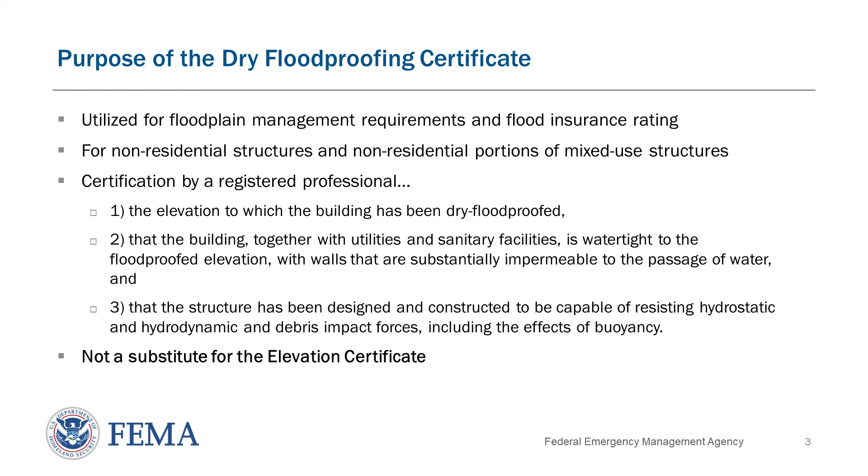Updates to this form and others are performed on a cycle, which creates an opportunity to align them with emerging information and provide additional clarifications or instructions. FEMA has updated the NFIP insurance rating methodology, leveraging industry best practices and cutting-edge technology to enable FEMA to deliver rates that are actuarially sound, easier to understand, and that better reflect a property's flood risk.

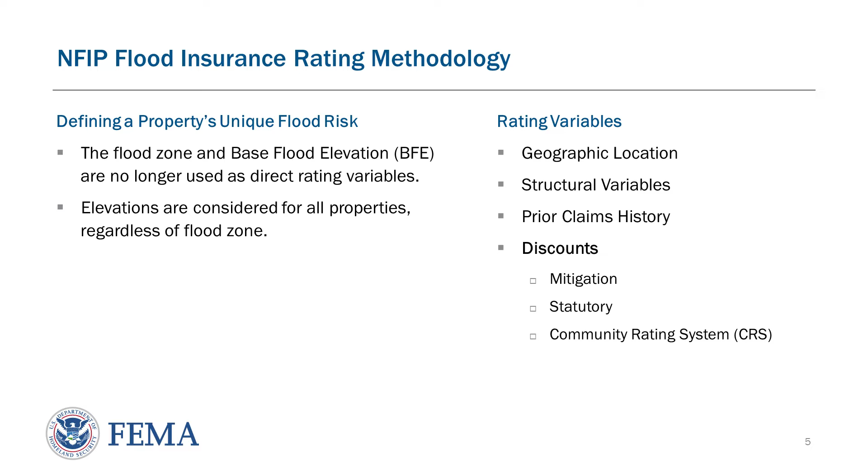FEMA now has the capability and tools to incorporate more flood risk variables to define a property's unique flood risk. Multiple flooding types, the cost to rebuild a particular structure, as well as geographic variables and a building's characteristics or structural variables are considered. A property's prior claims history and other mitigation and statutory discounts are also included in the calculations. One of those potential discounts is for dry floodproofing.

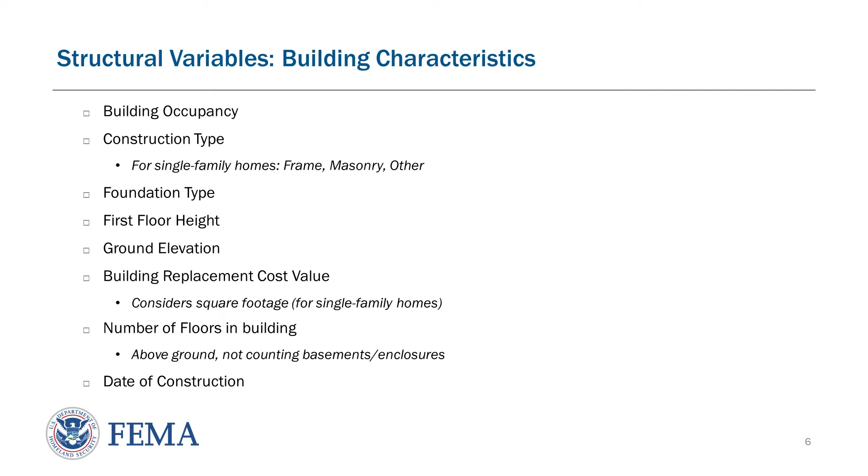Here's a brief list of some of those building characteristics or structural variables, many of which are captured on the elevation certificate. Then there are various types of flood insurance discounts that could apply when a property owner takes mitigation steps to help reduce flood damage to the property, or when certain construction elements or thresholds are met.

For example, there are discounts for certain foundation types, for proper elevation of machinery and equipment, or for being in a CRS participating community. In the case of a non-residential building, or a mixed-use building that's properly dry floodproofed, a policy discount may apply where appropriate. The Flood Insurance Manual describes that the NFIP requires a floodproofing certificate to consider the floodproofing mitigation measures in rating a building. This means you must have this certification to determine if you're eligible for that flood insurance discount.

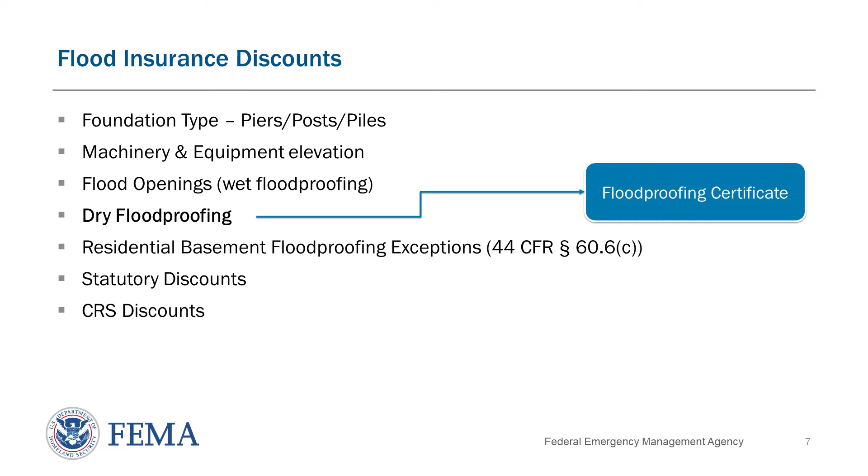Eligibility for a floodproofing discount is not just in the special flood hazard area anymore. FEMA is expanding those policy discounts, making them available to properties outside those high-risk flood hazard areas. So in non-coastal special flood hazard areas, those zones starting with the letter A, as well as outside of the SFHA, in zones B, C, D, or X, floodproofing discounts are going to be available. This discount is not available in V zones because dry floodproofing is not allowed in V zones.

The instructions on the form specify the expanded availability of the discount. The performance standard of 1 foot above the base flood elevation, or BFE, in the special flood hazard area is still listed. Plus, for non-special flood hazard area zones, the performance standard of 2 feet above the natural highest adjacent grade, or HAG, is the performance standard for eligibility for credit. We'll come back to this performance standard when we talk about the sections of the form.

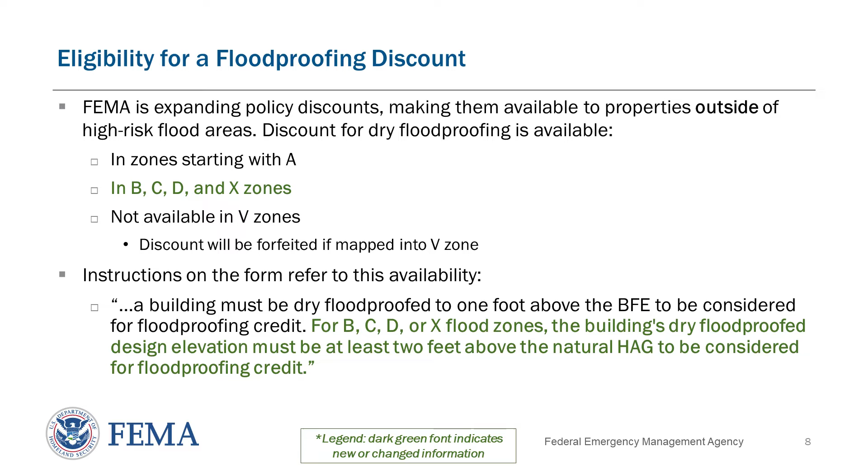While the form we're talking about in this video is for non-residential structures, please note that there are very rare cases where communities have an exception from FEMA for dry floodproofing residential basements. There are not very many of these across the country. They must have specific language in their local ordinance, and they must pass a technical review by FEMA before approval. This is defined in 44 CFR Section 60.6. For these rare cases, there's a separate residential form, the NFIP's Residential Basement Floodproofing Certificate. For more information, please visit FEMA.gov.

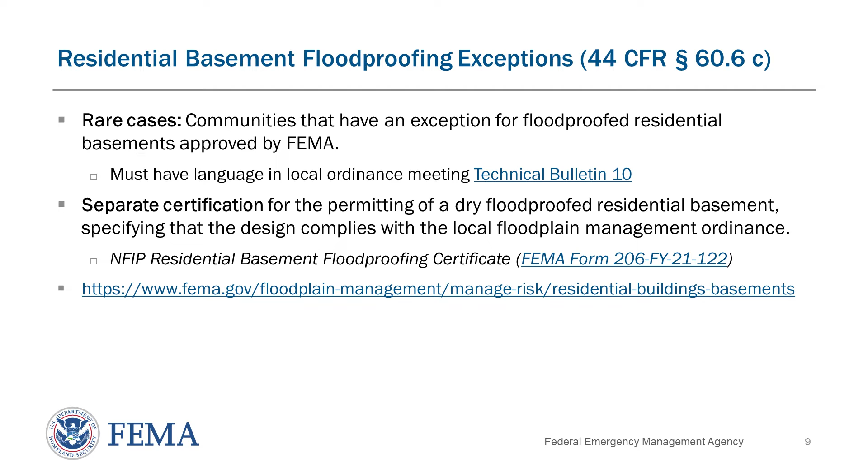Another reason for updating this floodproofing certificate is to reflect building code requirements. While the minimum National Flood Insurance Program requirement is dry floodproofing to the base flood elevation, building codes that many states adopt do go beyond that minimum.

The international codes have provisions that constitute higher standards, such as freeboard, and ASCE 24 talks about flood-resistant design and construction. This engineering consensus standard has been incorporated by reference by the I-codes since 2000. Although some states don't require adoption of the I-codes, FEMA still recognizes this as the national standard, and thus as the threshold for eligibility for that flood insurance discount.

According to ASCE 24, the minimum elevation for dry floodproofing is at least to the base flood elevation plus 1 foot. ASCE 24 also specifies that dry floodproofing measures are not allowed in coastal high hazard areas, coastal A zones, and other high-risk flood hazard areas. These measures are also not allowed for residential structures. This information helps floodplain administrators in determining the appropriateness of dry floodproofing in each area.

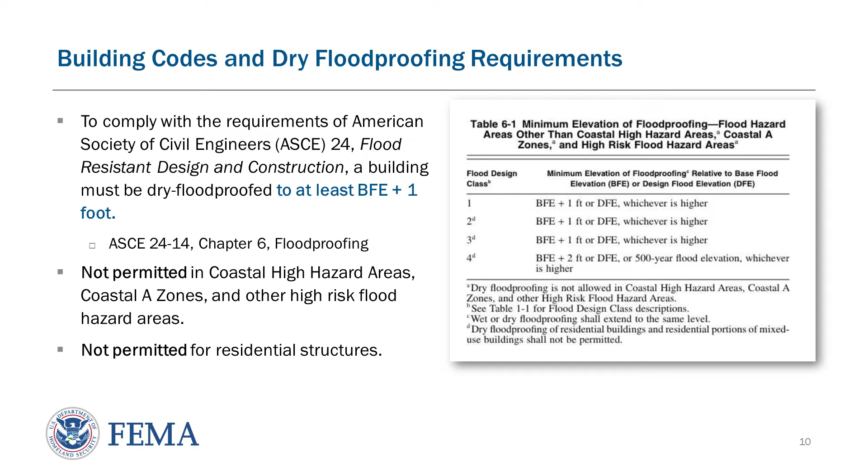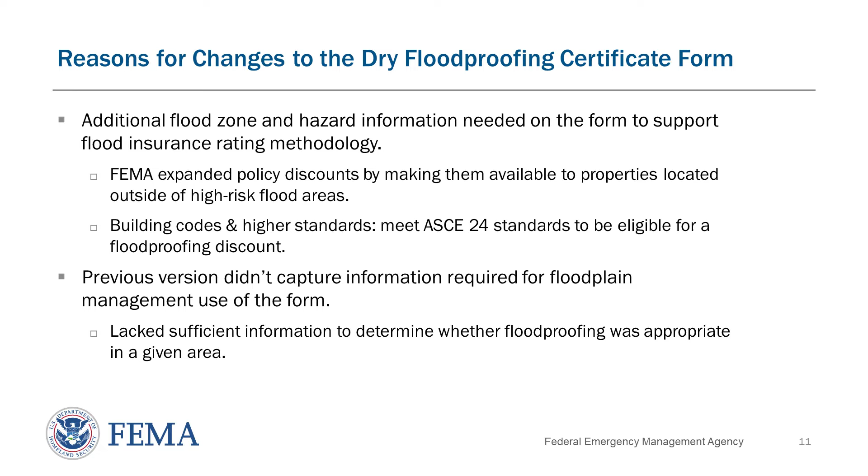Some of this data was not previously captured on the floodproofing certificate, so an update to the form was needed. In summary, key updates to the form relate to the NFIP flood insurance rating methodology, needing data the old form did not provide. Due to the expansion of policy discounts available to properties located outside the SFHA, we now need information about those areas. This addition also clarifies questions related to the building code and the ASCE 24 standards, which the form didn't previously capture. Finally, this updated form will better capture the information needed to help floodplain managers determine whether dry floodproofing is even appropriate in an area.

Before we get into the form section by section, let's revisit some key definitions and some of the regulatory basics in CFR about floodproofing, specifically dry floodproofing. Floodproofing is defined as any combination of structural or non-structural additions, changes, or adjustments to structures, which reduce or eliminate flood damage to real estate or improved real property, water and sanitary facilities, structures, and their contents. You'll notice that this definition does not specify wet or dry. In the NFIP regulations and the expanded guidance that discusses how this is done, floodproofing is understood to refer to dry floodproofing, rather than the wet floodproofing approach of letting floodwaters enter and flow through a structure.

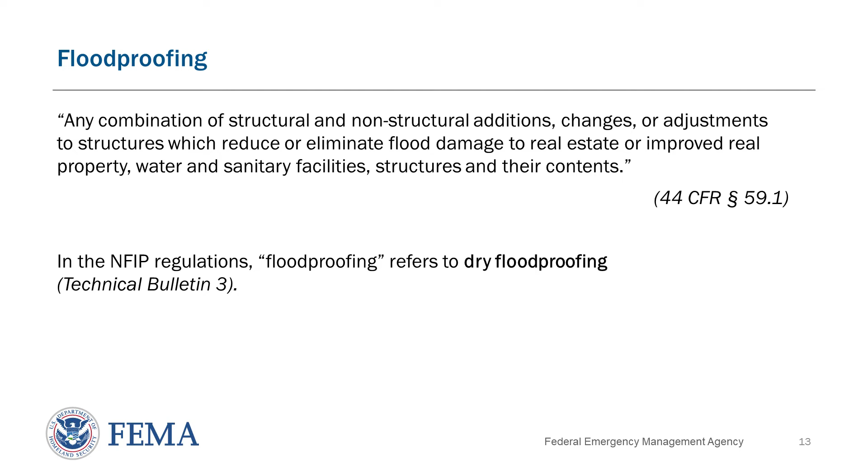Let's highlight that distinction between wet and dry floodproofing. Wet floodproofing is those structural measures that provide resistance to flood damage while fully allowing the floodwaters to enter that structure or area. Here, we're typically talking about things like flood openings or breakaway walls for enclosures below the BFE, along with flood-resistant materials and methods in those enclosed areas, as well as the proper protection of mechanical and utility equipment. Under the NFIP, wet floodproofing is limited to enclosures below elevated structures that are used only for storage, parking, and building access. It's also allowable for accessory or agricultural structures that have been issued variances for wet floodproofing by the community.

Dry floodproofing, by contrast, is the type where we're trying to keep water out of the building. This is not going to allow floodwaters to pass through. Those enclosures use special sealants, components, equipment, coatings or doors or panels, shields or pumps to keep it watertight and substantially impermeable. That's what this dry floodproofing certificate is for. Dry floodproofing is an approach that is not appropriate in all areas or for all uses. It's not permitted for residential structures or for any structures in those coastal high hazard areas where the buildings are subject to added wind and wave forces.

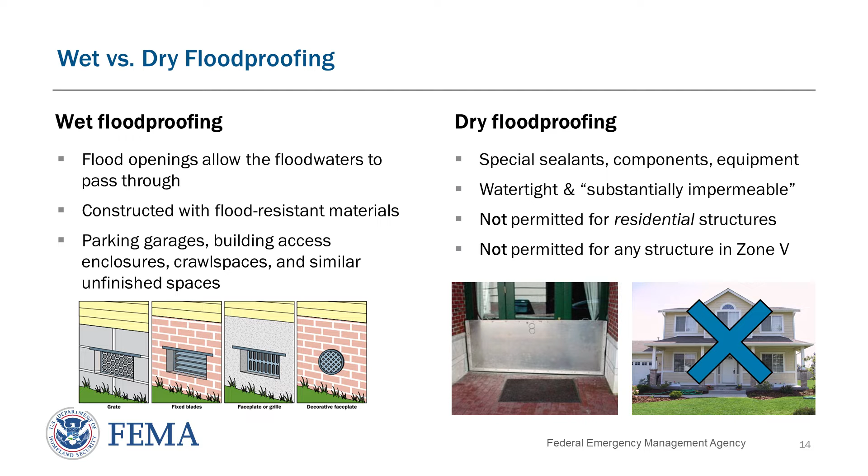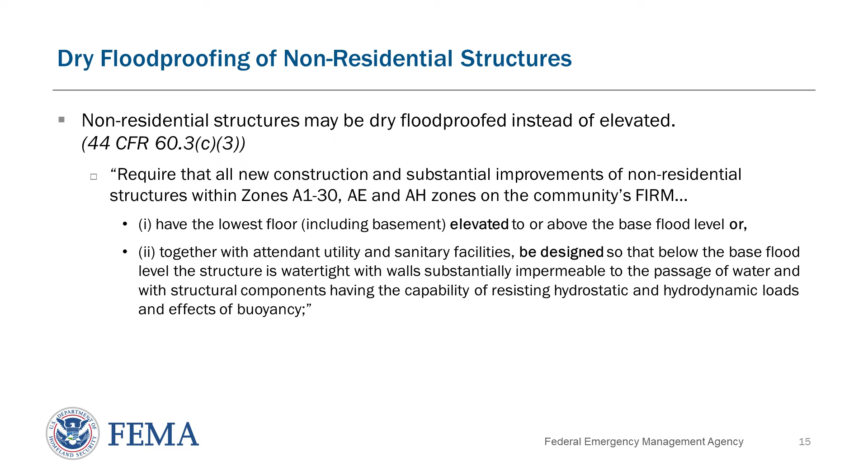The Code of Federal Regulations tells us who can take this approach and what the standard of performance is. For non-residential buildings or non-residential portions of mixed-use buildings, dry floodproofing may be permitted as an alternative to elevation in those non-wind and wave action zones. If that dry floodproofing path is taken, then the appropriate certification is required. You will need a registered professional engineer or architect to review the design, specifications, and plans to verify the construction is in accordance with the accepted standards of practice. This is a foundational reason for why we have the Dry Floodproofing Certificate. The local floodplain administrator is required to maintain a record of those certifications.

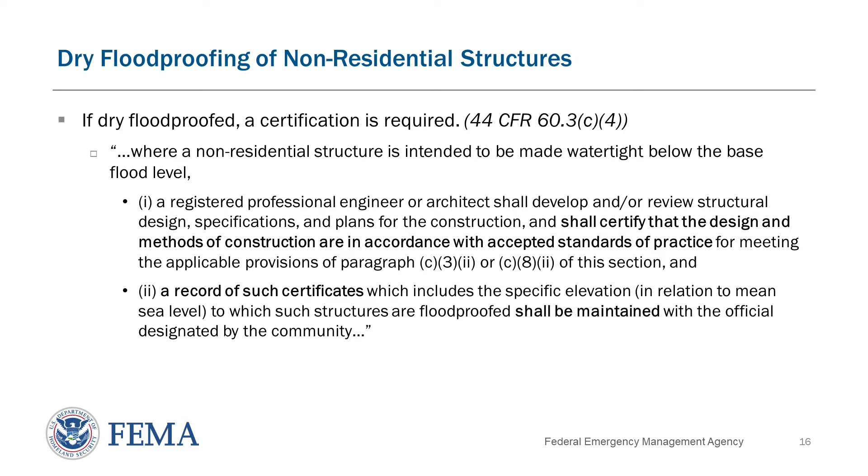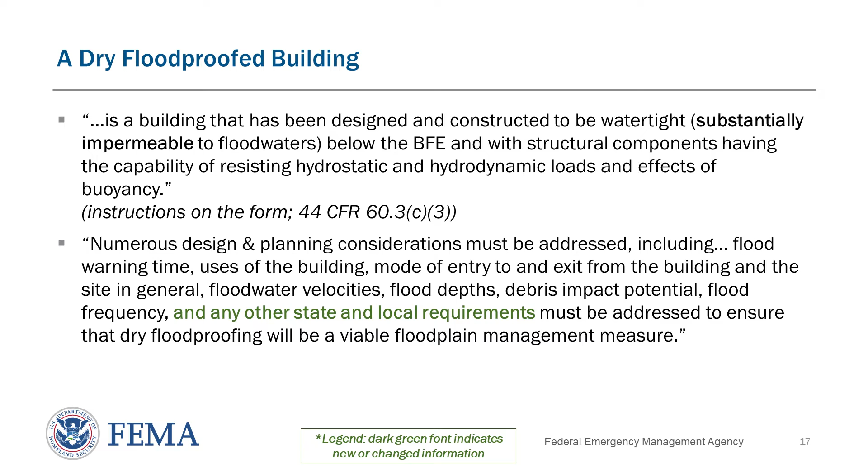Language from the CFR is reflected on the purpose and introduction page of the Floodproofing Certificate. A bit of new text in the instructions recognizes that there may be other higher state and local requirements that also need to be addressed or considered when ensuring that dry floodproofing is an appropriate or viable flood protection measure in an area. There are many things to consider when choosing whether or not to take a dry floodproofing approach. Let's review what substantially impermeable actually means. FEMA Technical Bulletin 3 and our engineering design standards acknowledge that in a building designed to be watertight, seepage through different points of entry might result in some accumulation of water during flooding.

ASCE 24 says a structure is considered substantially impermeable if it is not allowing more than 4 inches of water to accumulate on the inside of the building in a 24-hour period, without relying on active devices for the removal of the water. This is different from wet floodproofing, where we're allowing all of the water in. Here, we're trying to keep all of the water out, but we recognize there may still be a little bit of seepage.

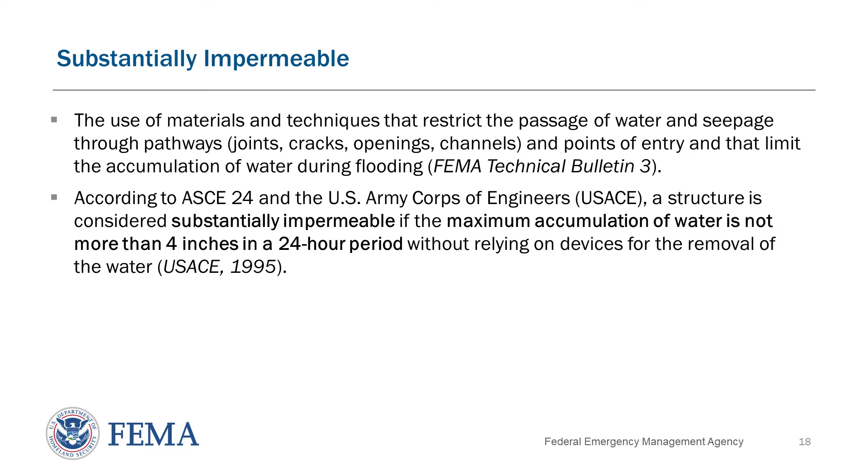There is not a one-size-fits-all approach to dry floodproofing. There are many different measures, or combinations of measures, that can meet this performance standard. It could be just doors and windows, or panels, or just seals, or a combination of those things.

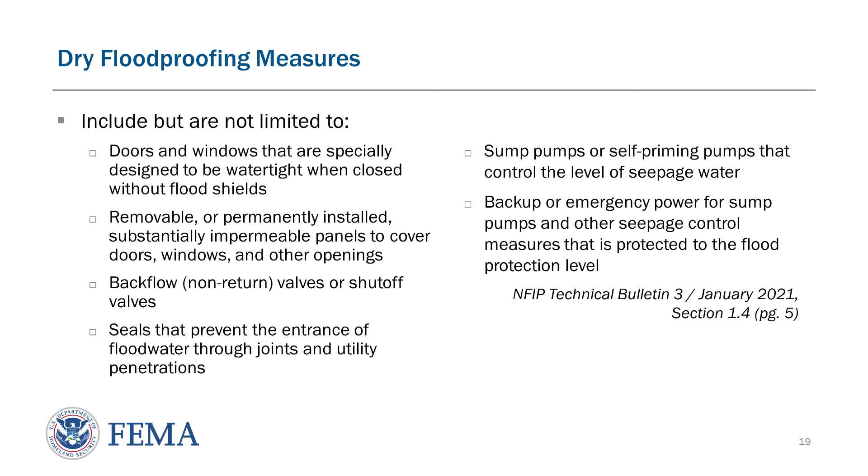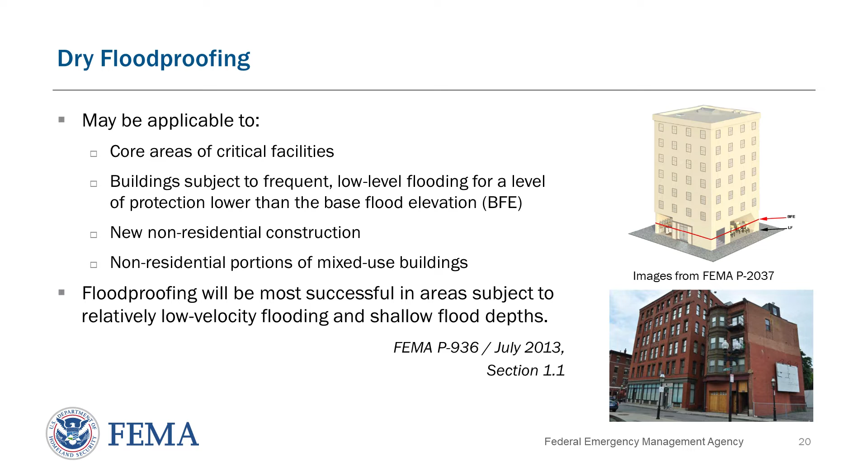FEMA technical bulletins and guidance documents provide discussions of when it might be appropriate to use this approach. Floodproofing might be appropriate for core areas of critical facilities, buildings that are non-residential and subject to frequent low-level flooding, new non-residential construction, or non-residential portions of mixed-use buildings. Again, dry floodproofing would be most successful in those areas that do not have high velocity flooding and do not have very deep flood depths.

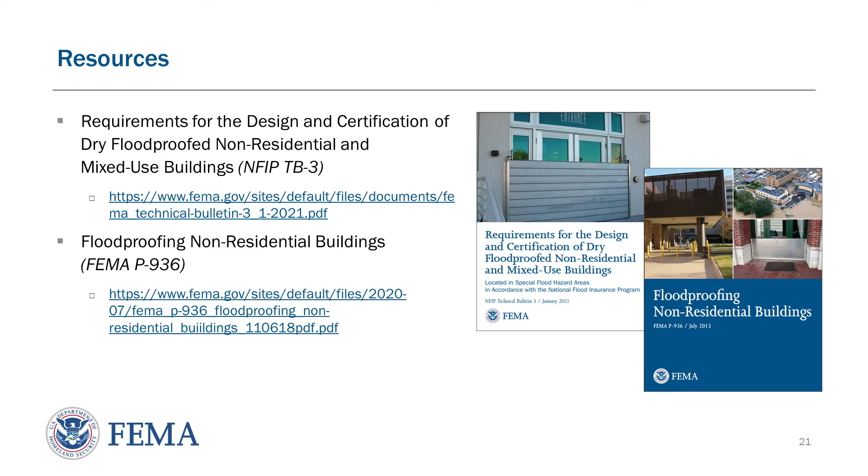Because there's not a one-size-fits-all approach, FEMA has detailed guidance about what performance standards must be met for a structure to be considered appropriately dry floodproofed. Engineering calculations, methods, and standards are found in FEMA Technical Bulletin 3 and in Publication 936 about floodproofing non-residential buildings, as well as in Publication 2037, Flood Mitigation Measures for Multifamily Buildings.

A determination of whether something is dry floodproofed will involve technical analysis and justification. This is much more about data, backup documentation, and an assessment of components, so we need a registered engineer's signature and seal to certify that design is in accordance with ASCE 24. The local floodplain administrator uses this in their permit review process and will keep that documentation in their permit records.

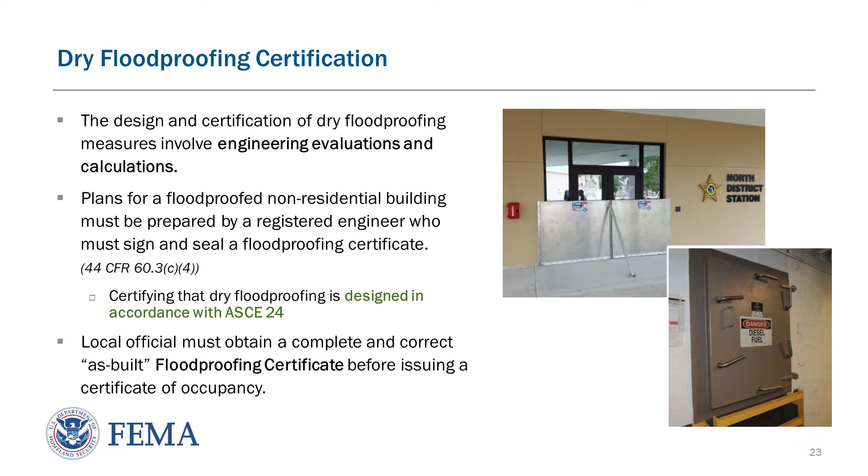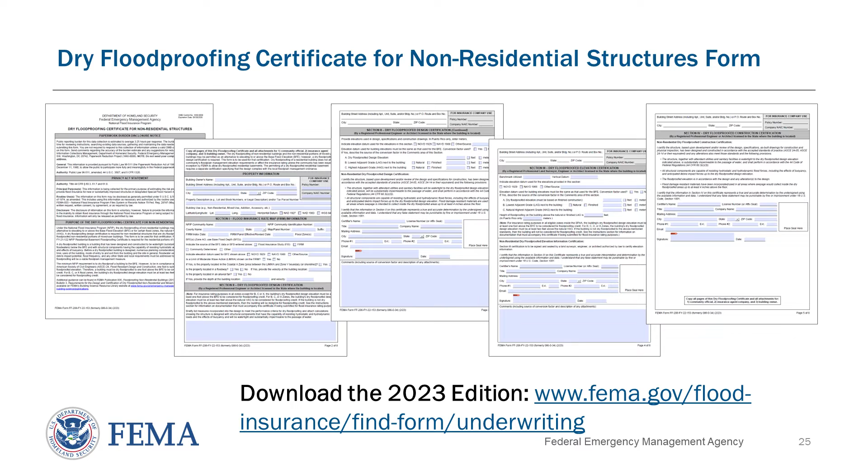Next, let's talk about the form itself. The Dry Floodproofing Certificate for Non-Residential Structures form now has 4 sections, plus a few pages for instructions. The new form was implemented on July 7, 2023, and is currently available for download at FEMA.gov. The previous version of the form has been approved for use until November 1, 2023.

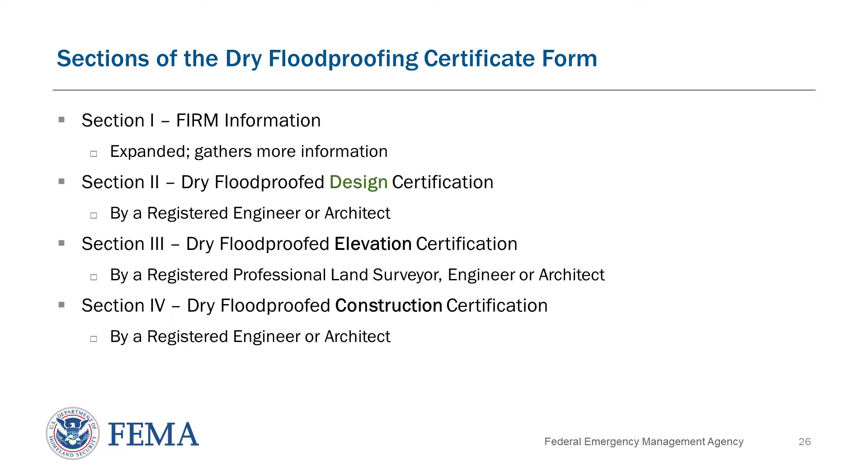The form has 4 sections, with expanded instructions that provide additional clarity on the required documentation that must be attached. There is no section for the public or homeowner to certify information on this dry floodproofing certificate form. This is a form used by engineers and other licensed professionals.

The instructions specify the dry floodproofing approach for non-residential buildings, and that for mixed-use buildings, it might be appropriate to dry floodproof just those non-residential portions on the lower floors. The instructions provide a detailed listing of the required documentation that must accompany this certificate. Also included in the expansion to the instructions are updated web addresses for relevant guidance documents and updated links to FEMA's Flood Map Service Center.

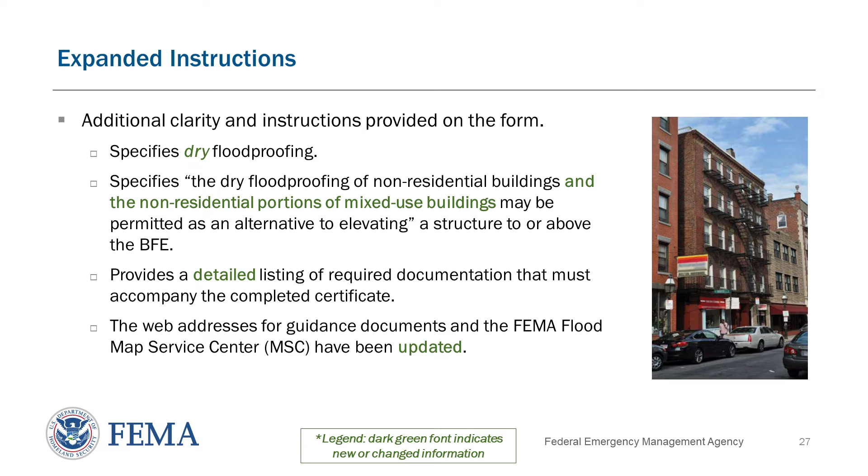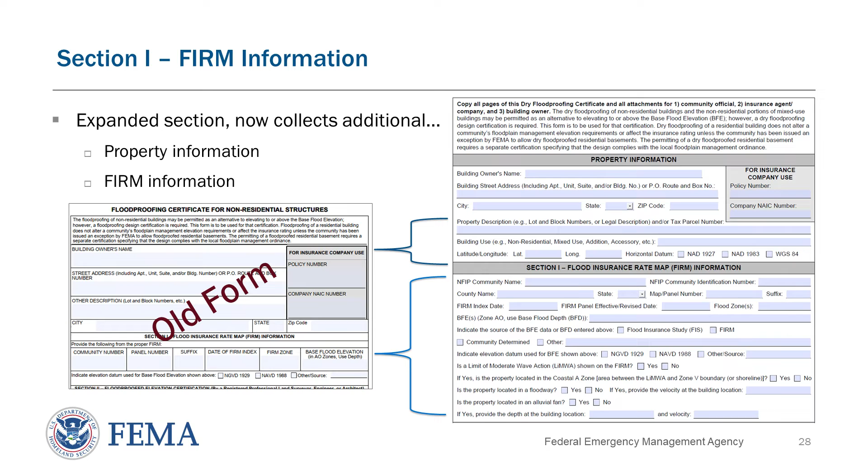Section 1 is for the flood insurance rate map, or FIRM, information. In comparison to the prior version of the form, we're now collecting additional property information and additional information off the FIRM with better descriptions of the hazards. In this section, we're still collecting information that describes the property. There's now a row for building use.

This is important because the dry floodproofing approach is applicable only to certain types of structures. There's a new row for the latitude and longitude, as well as the horizontal datum.

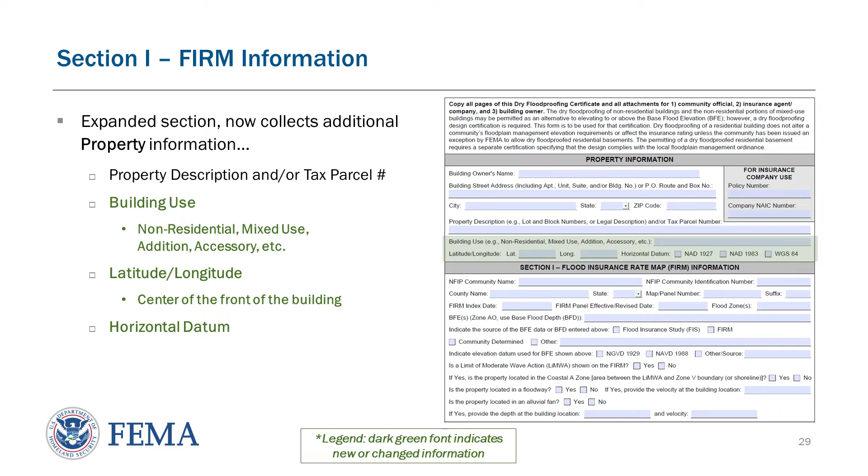On the FIRM information portion of Section 1, we're collecting both the community name and community ID, or CID number. This helps ensure FEMA is appropriately applying the correct participating community in which the structure is physically located.

There's a prompt here for multiple flood zones and base flood elevations for sites where there might be a bit more nuance to what's going on. For example, there may be a larger commercial structure partially in an AO zone and partially in an AE zone. In this case, there would be multiple flood zones and BFEs or depths that would apply. The form is also asking specifically about the source of the BFE or depth.

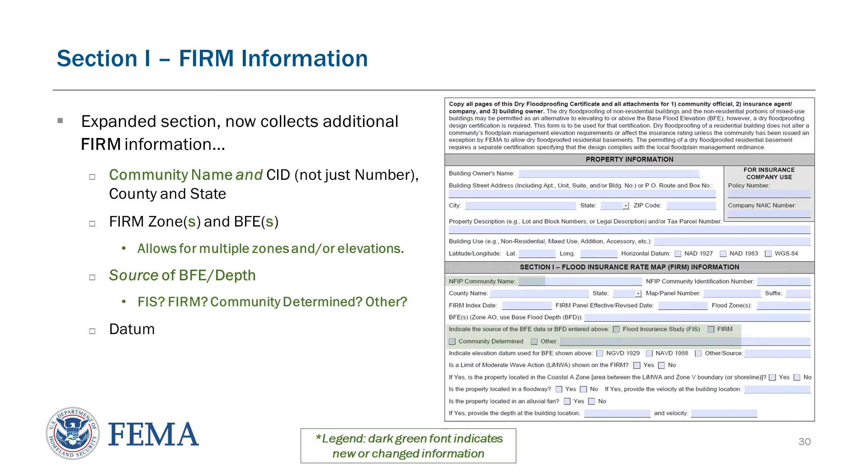We're now collecting information on 3 elements of flood hazard details. These tie directly back to ASCE 24 and the thresholds for determining when dry floodproofing is appropriate.

First is the limit of moderate wave action, or LiMWA. If that line is shown on the FIRM, we're going to check a box indicating so. Then we want to make sure we understand the location of the building in relation to that LiMWA line. This ties right back to the ASCE 24 standard. Here we're looking to demonstrate whether a building is landward of the LiMWA, where dry floodproofing is permitted, or waterward of that line, where it is not permitted.

Next is regulatory floodway. If you've got a structure in or partially in a regulatory floodway, indicate that here. Obtain the velocity in the area of that building. Then we'll verify if the velocity is underneath the threshold that would make it ineligible for that mitigation discount credit. Finally, for sites located in an alluvial fan, you must indicate both the depth and the velocity of the water.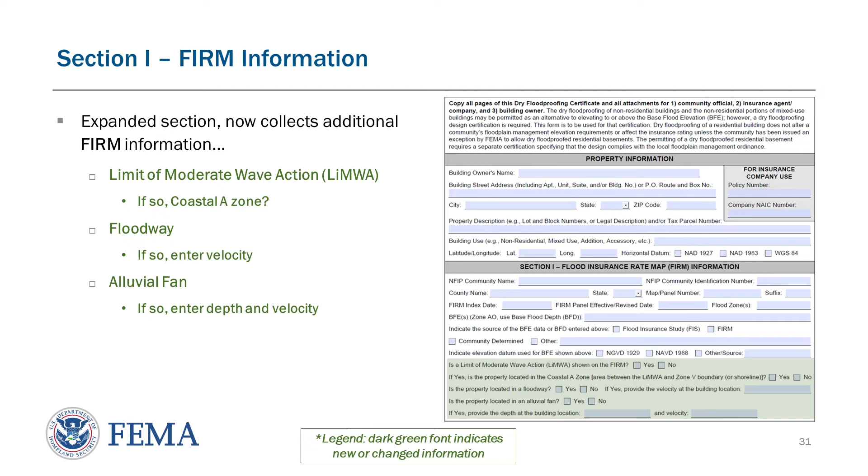Here's a walkthrough example for each of those three elements.

For the LiMWA, the form asks: is there a limit of moderate wave action shown on the FIRM? Yes or no? In example structure A, there is a limit of moderate wave action shown on the FIRM. Note that the arrows pointing towards the open ocean or shoreline indicate the waterward and landward directions for this particular map on the left. For structure A, we would label this yes on the FIRM and show that it is not located between the LiMWA and the Zone V boundary or shoreline.

This one is landward of the LiMWA, so indicate no in the second box. Property B is waterward of the LiMWA line. In this case, on the form you would say yes and yes.

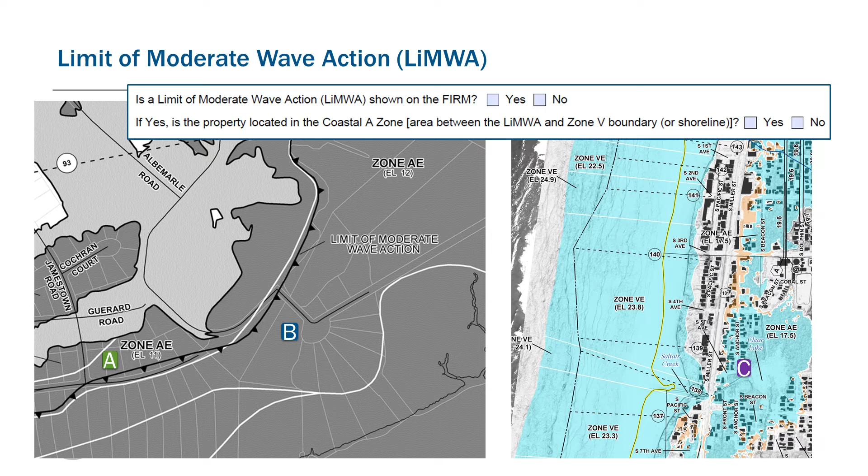With example C on the right, if you're having trouble finding the LiMWA line, it's because there isn't one. In this case, we would just say no on the form, because there is no limit of moderate wave action shown on the FIRM.

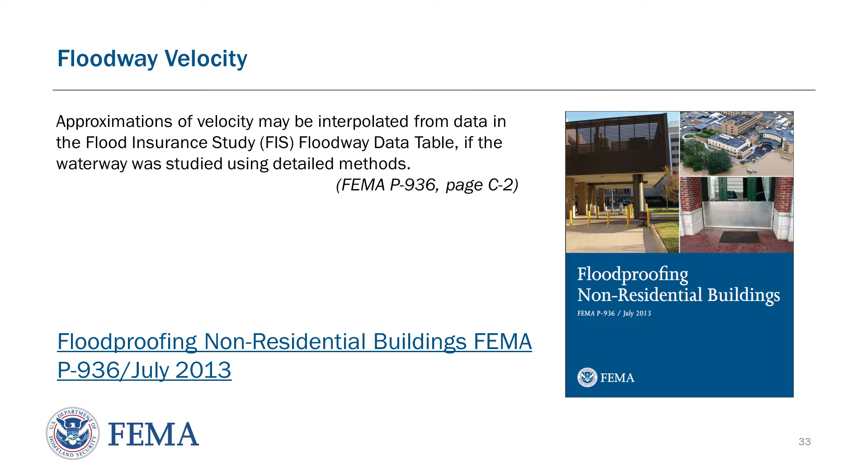For regulatory floodways, we'll refer back to guidance in FEMA Publication 936. It specifies that we can get these approximations of velocity from the data in the floodway data tables in the flood insurance study.

As an example of what that looks like, here are a few fictional structures that are partially or completely in a regulatory floodway. In this case, we'll check the box for yes on the form. Then, we need to go and get some more information from the flood insurance study.

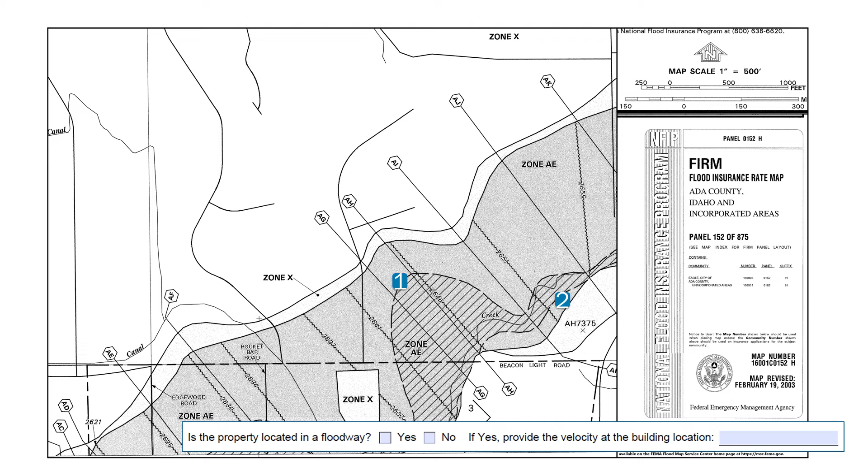Find the floodway data tables for the appropriate flooding source and confirm you're looking at the table with the correct riverine cross-sections. When determining the BFE, we know that we cannot interpolate between wavy lines on the map for the BFE. For the floodway velocity piece, guidance tells us that we can interpolate those approximations of velocity from the data in the FIS data table.

So property 1 is located between cross-sections AH and AG. We'll go to the floodway data table and find the mean velocity column. We can interpolate between 4.8 and 3.8, so we'll say that's about 4.3. Again, we're rounding to the same nearest tenth of a foot found in the data tables.

Property 2, on the other hand, has a narrower regulatory floodway. Between cross-sections AJ and AI, we see 8.9 and 7.8. So we're looking at about 8.3 or 8.4 for our floodway velocity here. In both cases, we would indicate yes for velocity and then provide the number at the building location.

Of course, this would be in addition to all other floodway development requirements, including no-rise analysis. Doing this exercise for the dry floodproofing certificate does not substitute for an H&H floodway encroachment analysis for a proposed building.

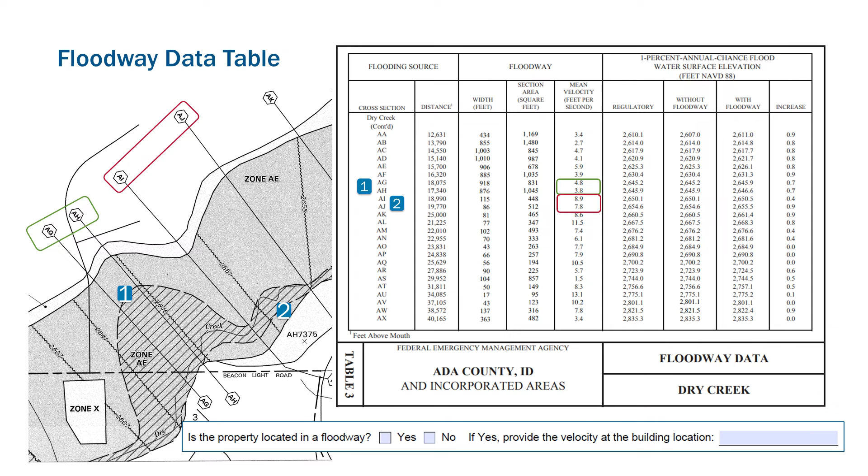For our alluvial fan example, note that these AO zones have both a depth and a velocity printed right on the map. So we would say yes on the form, and then we'd provide the depth in one blank and the velocity in the second blank.

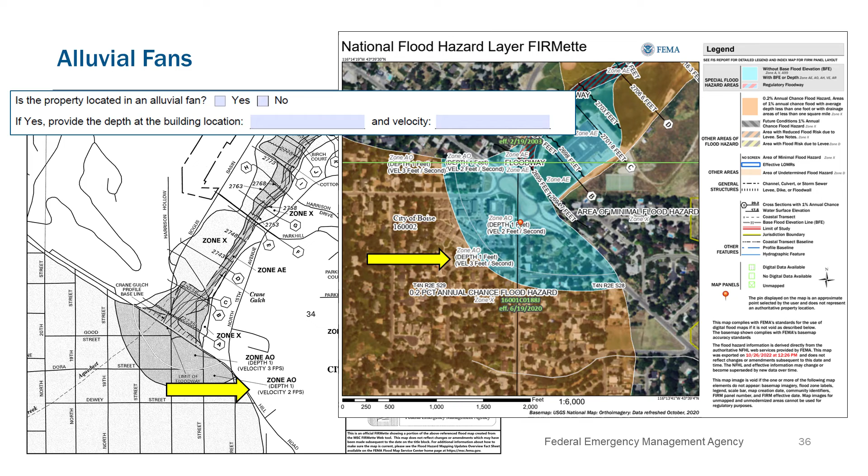Why collect this additional information? The floodplain manager is going to use this data for floodplain management purposes, but it's also useful for underwriters for verifying the eligibility for that dry floodproofing discount.

Remember, the minimum NFIP standards don't specify the limits based on the depth, velocity, or the presence of waves, but the FEMA technical bulletins and ASCE 24 do. FEMA does not recommend use of those dry floodproofing systems in areas where the depth of water is greater than 3 feet, where the velocity is too high, greater than 5 feet per second, or in coastal A zones waterward of LiMWA with breaking waves between 1.5 and 3 feet.

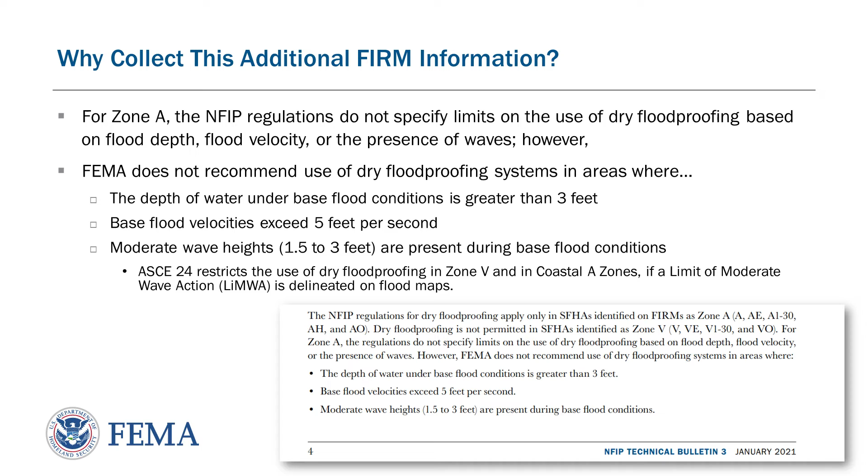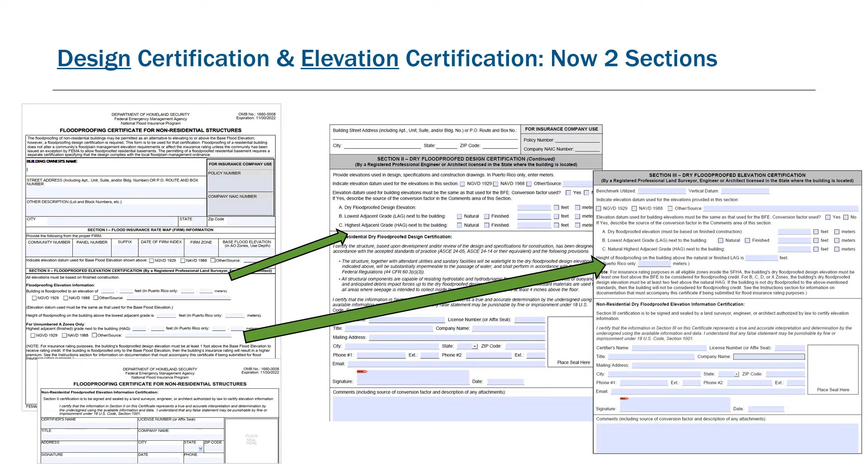There are now separate sections for design or pre-construction certification, as well as for finished construction elevation. There are different requirements for what professionals can complete in each section.

Section 2 is our new section, and it is for floodproofed design certification. It sets up the answers needed about the floodproofing methods that we're asking a registered professional engineer or architect, who is licensed in that state, to certify.

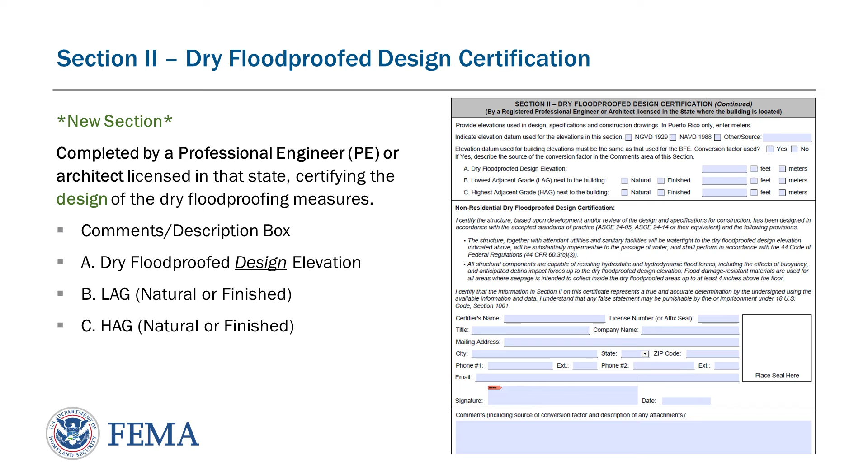The form asks what the dry floodproofing approach is, and to describe the result of that floodproofing approach. The comments and description box has space to capture this description, the design elevation, and the adjacent grades. Remember, this is prior to construction.

Because there are multiple ways to meet that dry floodproofing performance standard, it's important to tell the story of the proposed methods and measures here, and report the results or targets that approach will meet. There are feet or meters indicator boxes, and you'll also be indicating natural grade or finished grade for the lowest and highest adjacent grades. These are collected right next to the building.

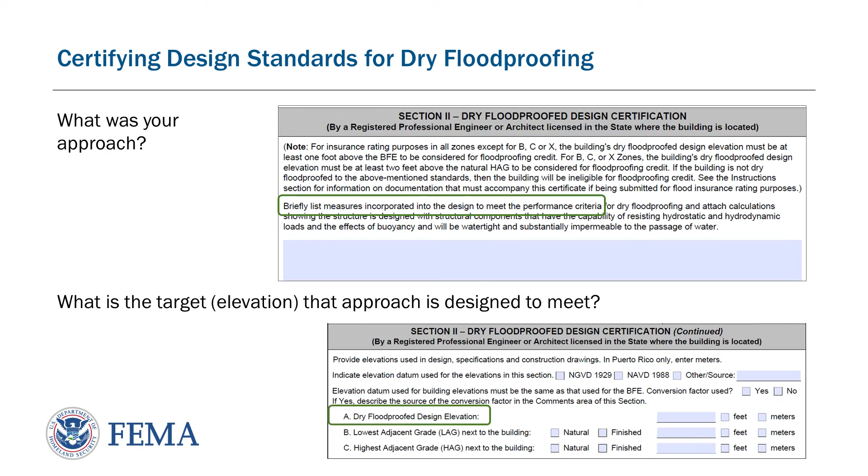Reinforcing the need to certify pre-construction design, here are some diagrams from various FEMA publications on those performance standards. This diagram shows how there might be some seepage, even in a dry floodproofed building where we're trying to keep all the water out. If we have less than 4 inches of water accumulating in a 24-hour period, ASCE 24 says that's substantially impermeable.

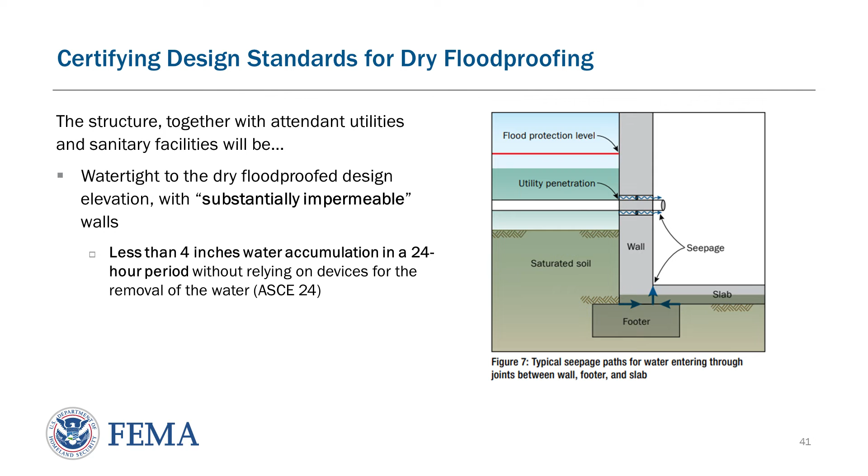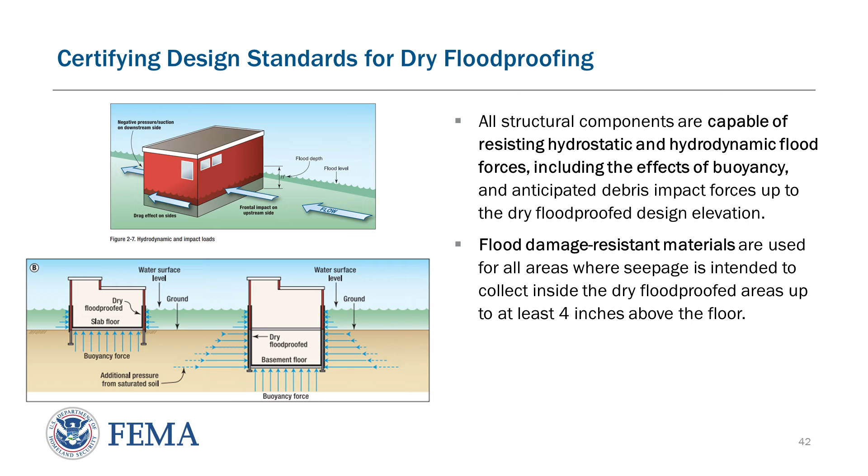Is the building capable of resisting all those flood forces? Hydrostatic and hydrodynamic forces? What about the effects of buoyancy? And are there appropriate flood damage resistant materials anywhere there could be some seepage?

Section 3 is for as-built certification. This confirms the as-constructed conditions or the elevation the building is dry floodproof to. The height above the lowest adjacent grade is also collected, with checkboxes to specify natural or finished. We're also documenting highest adjacent grade, specifically natural highest adjacent grade.

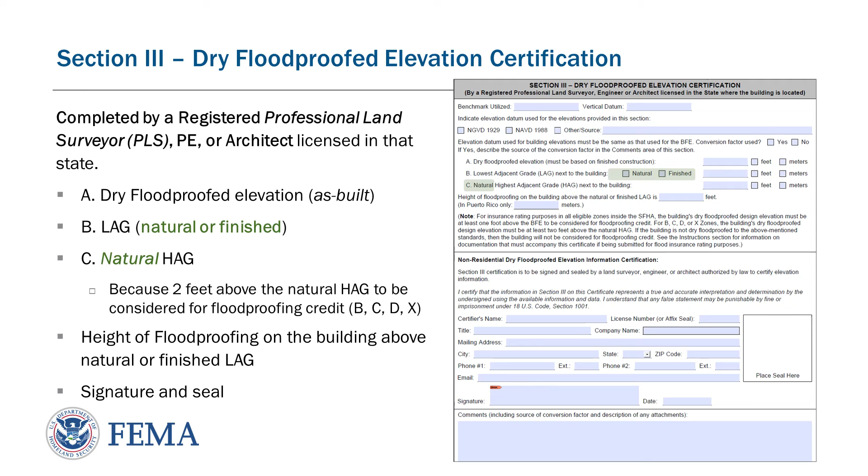That's because inside the special flood hazard area, we're looking for 1 foot above base flood elevation, and outside the special flood hazard area, at least 2 feet above the natural highest adjacent grade. That's the performance standard to be considered for dry floodproofing credit. The height of that floodproofing on the structure above the natural or finished lowest adjacent grade is also written as an indicator here. It should match the difference between your floodproofed elevation and your lowest adjacent grade elevation.

There's a new checkbox prompt if a conversion factor is used. If the datum used was different between the FIRM information and the building elevations collected, then the surveyor or licensed professional is prompted to check that box and describe the conversion factor in the comments area of this section.

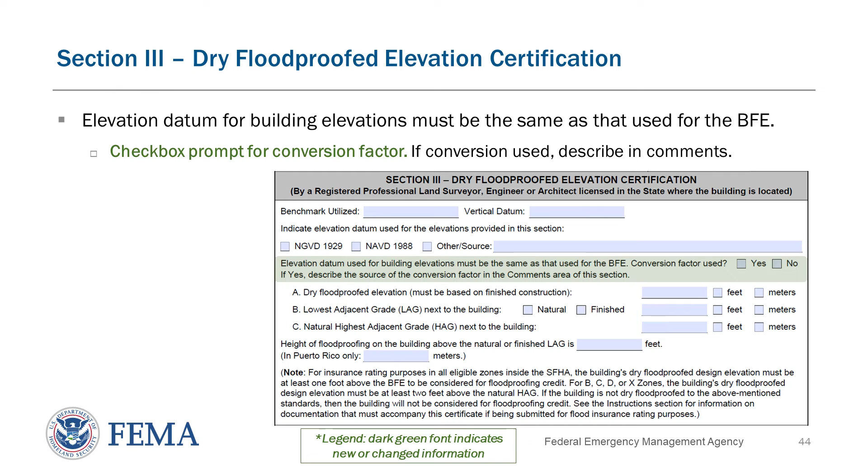The notes have also been expanded for this section with detail about the performance standard for dry floodproofing credit. 1 foot is subtracted from the dry floodproofed elevation, so a building in the special flood hazard area must be dry floodproofed to at least 1 foot above the BFE to be considered for floodproofing credit. And for those locations in zones B, C, D, or X, the building must be dry floodproofed to at least 2 feet above the natural highest adjacent grade to be considered for that dry floodproofing credit.

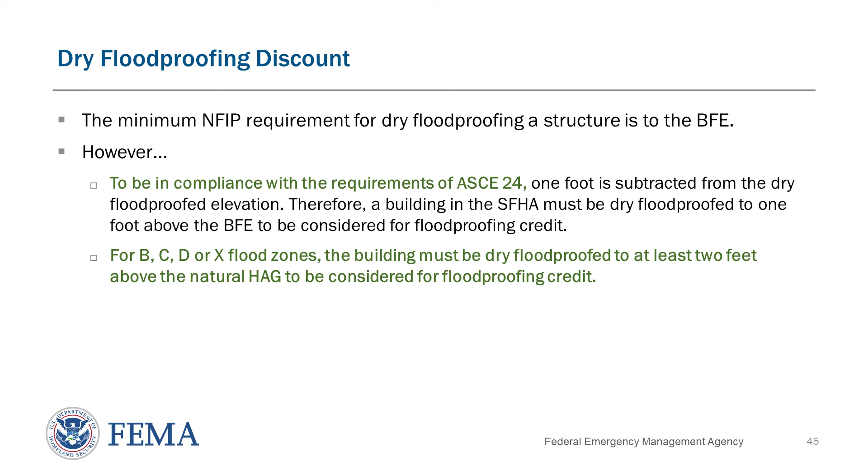Finally, Section 4 is where we put it all together. Section 2 said, here's what we're shooting for in the design. Section 3 says, here's the as-built elevations and adjacent grades. And Section 4 is where the engineer or architect says, I'm here to tell you that those 2 things together are enough. This section certifies both the design and the construction based on as-built drawings, the design specs, and a physical inspection of the finished construction of that building.

No additional data or numbers are entered or collected here. This is just a signature and a seal for the engineer or architect to certify their assessment.

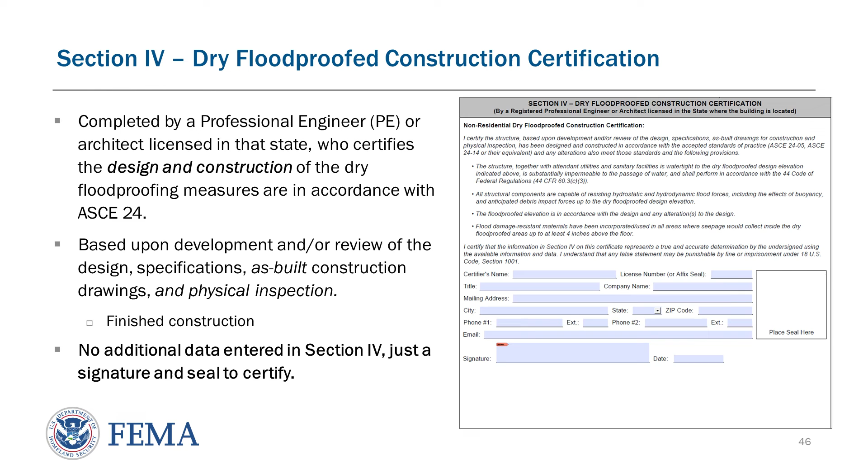The instructions for Section 4 have been expanded. It's still specifying, showing that the building is in accordance with accepted standards of engineering practice, that it is substantially impermeable to the passage of water, and that all of the structural components are capable of resisting flood forces.

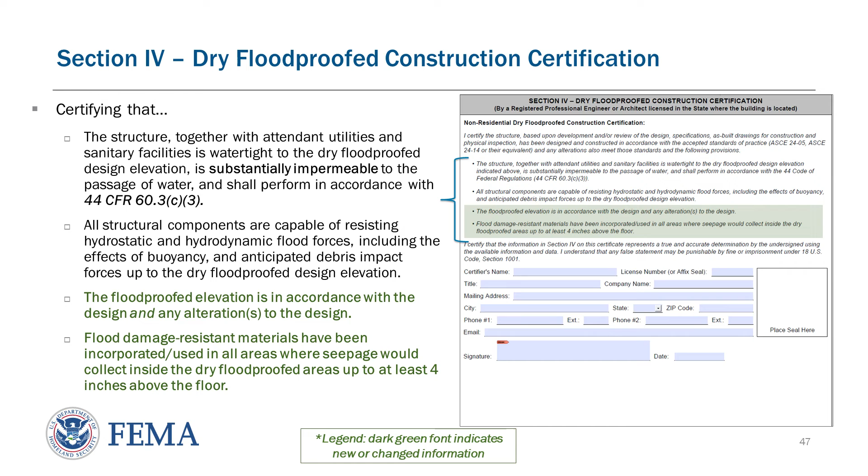There's a bit of new language that specifies the use of flood damage resistant materials in places where seepage may be expected, and clarifying that the as-built is in accordance with the design and any alterations to the design. If something had to change between design and as-built, this is a prompt to make sure that the information from design in Section 2 and finished construction in Section 3 considers and incorporates that alteration.

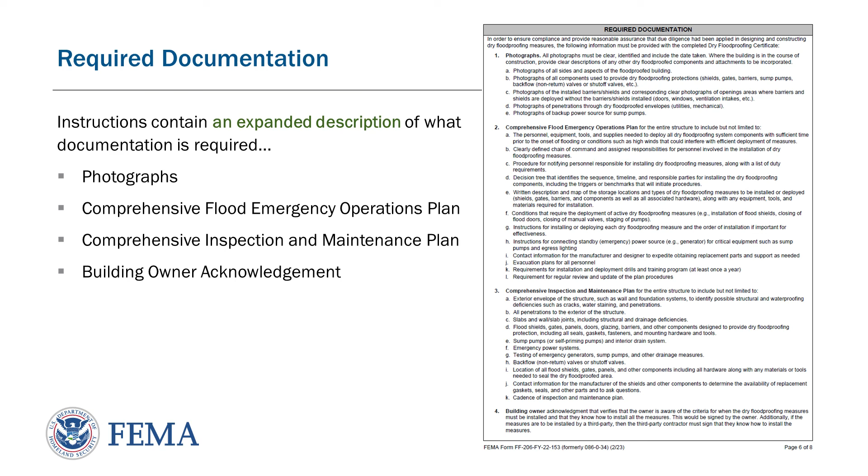To have that reasonable assurance that the engineer or architect did their due diligence, there's a lot of information that must be provided as backup documentation with this certificate. You can see there is a lot of detail and many specific instructions about the needed documentation. Photographs, a comprehensive emergency operations plan, an inspection and maintenance plan, and a building owner acknowledgement letter or form are all needed. Here's a summary slide for each of those types of required documentation.

For photographs, the form has more explicit detail about the multitude of photos wanted in order to be able to tell the story of how that dry floodproofing was achieved. What measures were used? What kind of components were used? Can we see all sides and aspects of the building wherever possible?

Take photos of all the different elements, the barriers, the shields, where they're deployed, where they're stored, and so forth. Someone should be able to review the photos and verify the information provided in the design and construction specs.

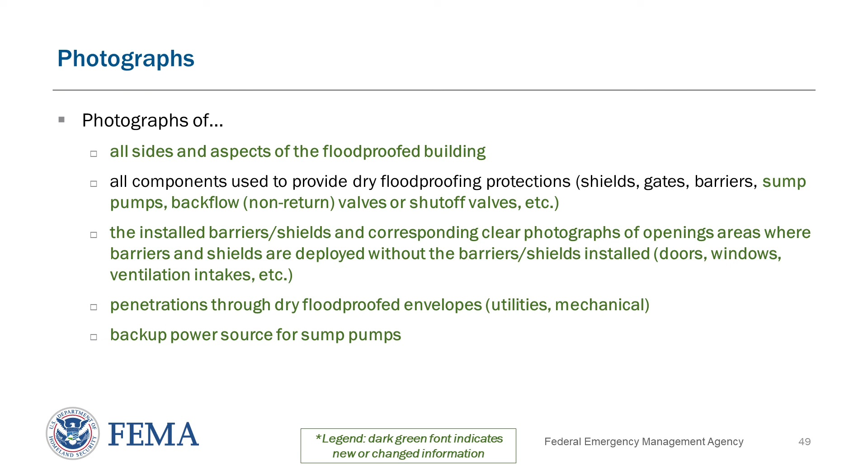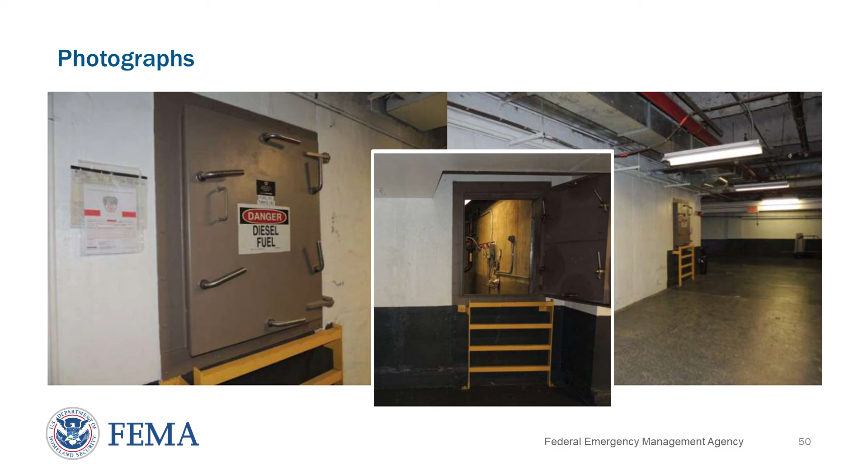Lots of new specifics about documentation for a flood emergency operations plan are provided for the entire structure. This plan must include a number of different things, including but not limited to who and what you need to deploy the system, what personnel and equipment you need, and the sequence and timeline of what triggers the installation.

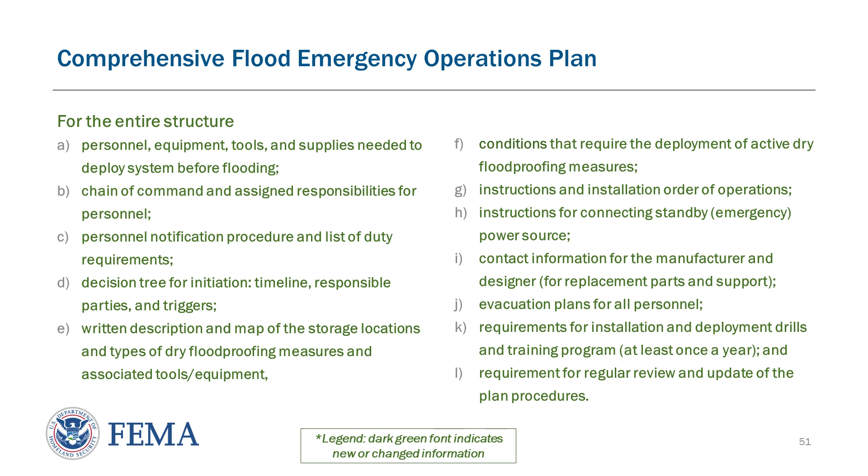Who gets notified? Who is responsible for which elements? Where are these things stored when they're not being used? Under what conditions do they get deployed? Where are the personnel and evacuation plans? How often is testing or drill running or staff training occurring? The plan should show also that there is a regular review and update of the plan and the procedures.

The comprehensive inspection and maintenance plan should have details for the entire structure, inside and out. Inspecting and maintaining any joints, seals, cracks, or structural elements. Checking the doors, panels, and sump pumps, or emergency backup systems. It even goes as detailed as getting the manufacturer's contact info so that you can get replacement parts or repairs.

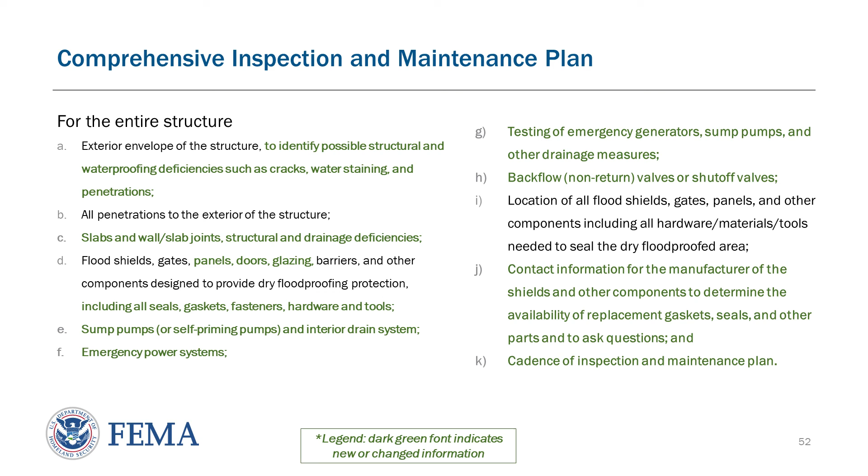This plan should also be maintained and updated regularly as needed. The final required document is a building owner acknowledgement, which becomes a separate document or letter on letterhead attached to the form. There's no official acknowledgement form for this.

We want a letter that verifies the owner is aware of the criteria for when those dry floodproofing measures must be installed and how to do it, and that they're familiar with the emergency operations plan and the inspection and maintenance plan.

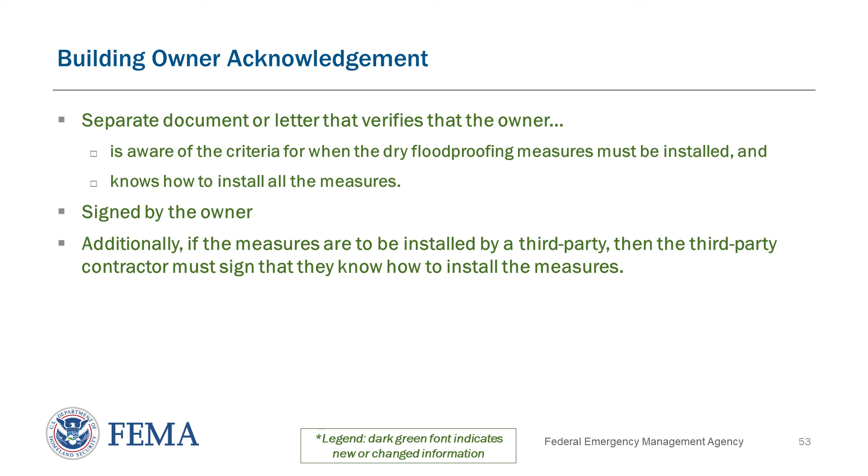Additionally, if the measures are going to be installed by a third party that the owner is working with, then the third party must also sign an acknowledgement form.

Copies of all pages of the Dry Floodproofing Certificate form and the required documents as attachments go to the community official to keep in their records, to the insurance agent and the underwriter, and to the building owner.

The insurer submits the required dry floodproofing documentation to FEMA, and FEMA reviews it and determines if everything submitted allows for eligibility of that dry floodproofing credit.

The submittal includes an application form, a completed elevation certificate, a completed dry floodproofing certificate, as well as the required attachments. Remember, the dry floodproofing certificate is not a substitute for the elevation certificate.

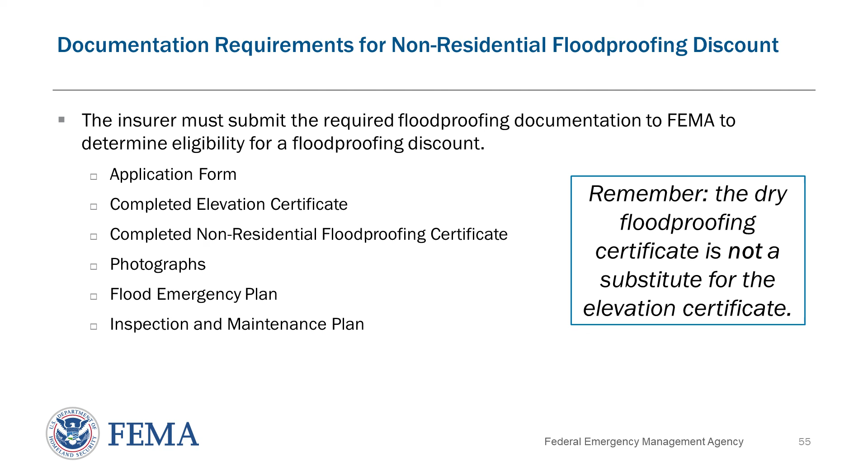Information must also be submitted annually to validate that continued eligibility for floodproofing credit. There's a set of questions that have to be answered at renewal each year for recertification by FEMA.

This is typically done with a letter on letterhead from the inspector, confirming the re-inspection date and what was inspected, that the inspection and maintenance plan has been reviewed and updated, and that the comprehensive flood emergency operations plan has been reviewed and updated. The updated documentation must be submitted to the email box NFIP Underwriting Mailbox at

fema.dhs.gov at least 120 days prior to the renewal effective date for any non-residential renewal receiving a floodproofing discount. The next update to the flood insurance manual will have an update about this in the How to Renew section.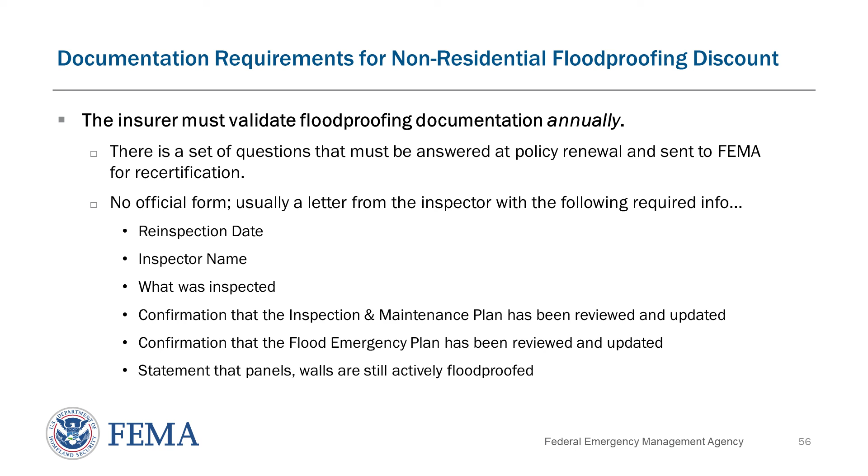In summary, these updates to the Dry Floodproofing Certificate form involve collecting additional information that ties directly to the requirements of ASCE 24, those national engineering standards. It helps us determine where that dry floodproofing approach is viable and where that building is eligible for the dry floodproofing discount, both inside and outside of the SFHA.

There's now a separate Section 2 for design or pre-construction review. The as-built elevations are collected in Section 3, and then Section 4 puts it all together, where the engineer certifies that both the design and the construction meet the performance standards.

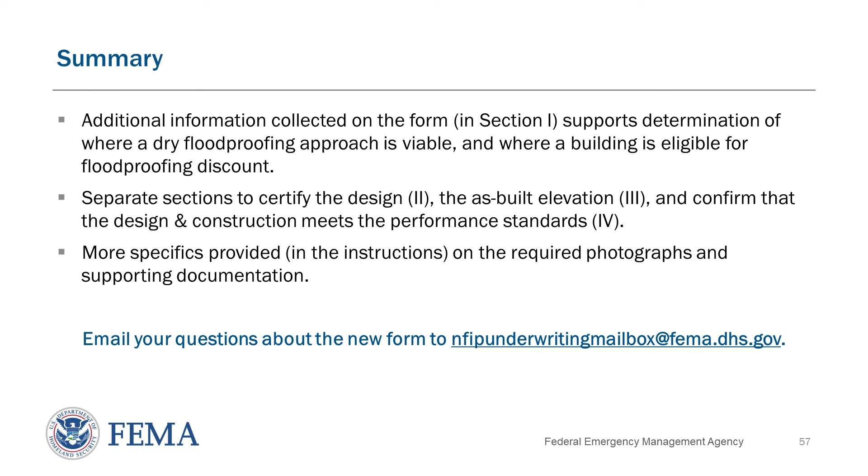Finally, the updated form has many more specifics provided on the required supporting documentation and photos that must accompany this certificate.